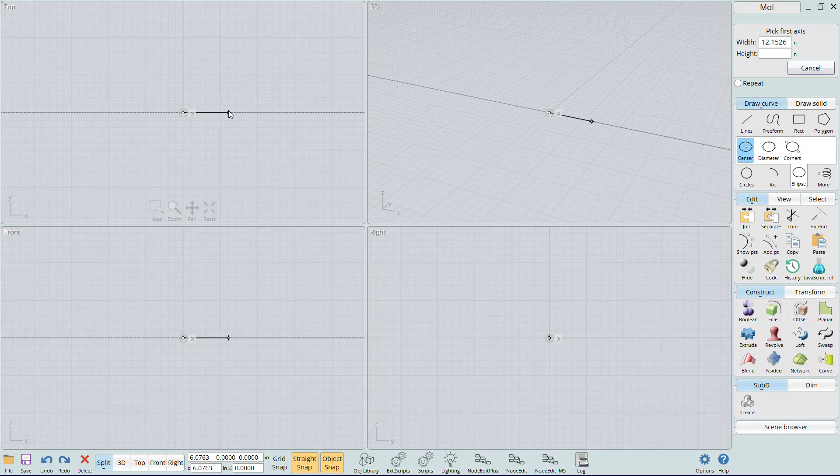Okay, checking out the Conic tool. Let's go with an actual size one.

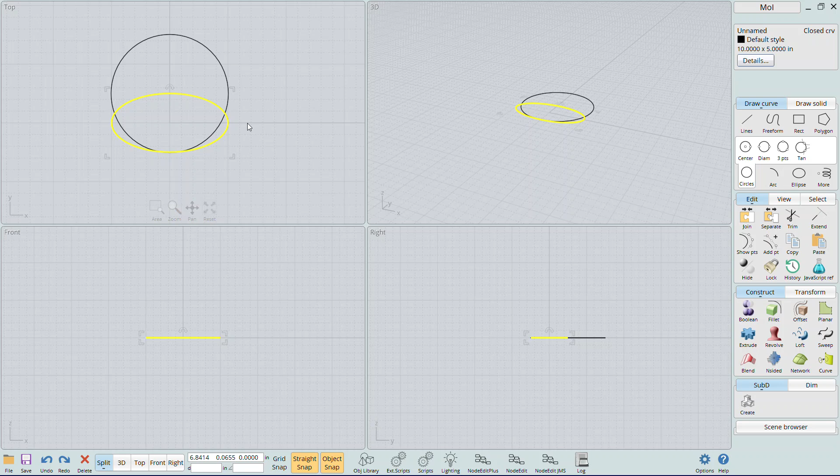And so there's an ellipse, a 5 by 10, 10 by 5. Okay, and then go ahead and put the foci on it, just for the sake of what we might want to look at after that. So that's a way to find the foci that I found. There's going to be one there, and there's going to be one there. So there's an ellipse with the foci for the conic on it.

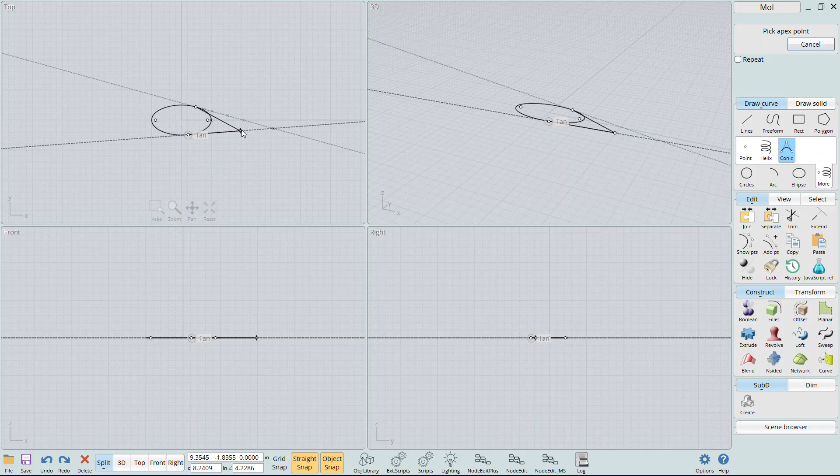So the conic tool, easy enough to figure out when you have the right side of the thing. Let's go ahead and start conic. And then if we can easily get the tangent points from wherever we're connecting to, right? We can easily generate that conic right there, right?

Did I miss one? I must have missed one of my pick points here. Let's just, I need to do this just to be sure I'm using, there's a bunch of snap points that I don't want to screw around with turning off right now. They're getting in my way. So let's use that one and this one. And now I can click there and there. And then it's a nice conic section.

And you can do that anywhere on any ellipse. So as long as you can get those tangent points, like say there and right here. Now I can get that one and then this, and I can match up that. You see? So that's basically using the tool.

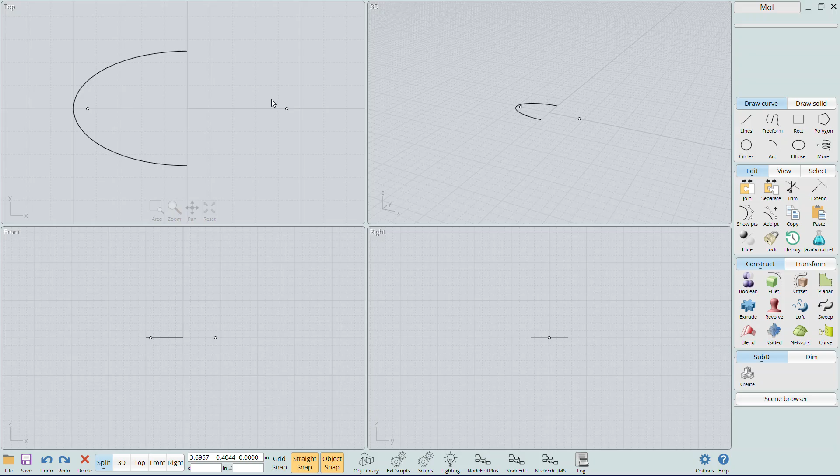And then I asked a question to Michael because I got stuck on what if I had this, right? And then I was basically like going, now how do I get the other half? How would I get the other half of that with that tool? Or that would lead into several different areas where if you just had part of a conic and you were trying to attach to it, but you didn't have the right thing to do it. So this isn't the answer to all those particular situations. In other words, there's the Arc Continue tool. It's basically almost the equivalent of doing blend, which gives you a nice smooth butt joint on that.

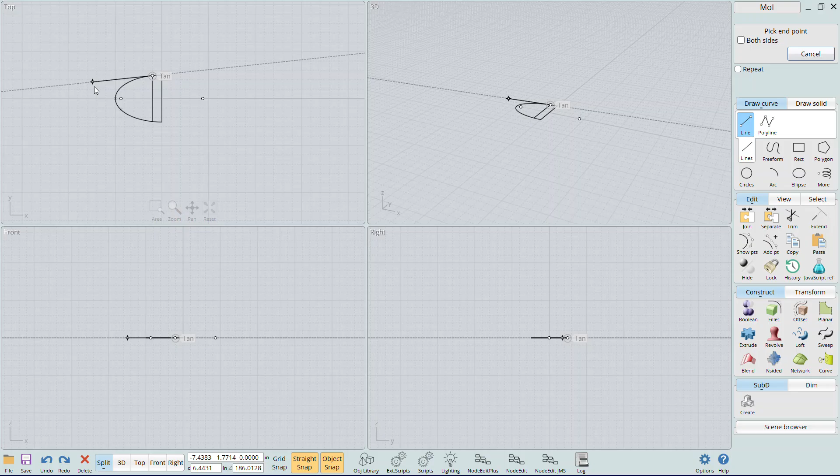But just something I found really quick I wanted to put in here was to use the other side snaps, right? And then I can just pick a random point there. And then now I can get that tan from that side, go all the way out to there, right? And now I can do this. Um, so let's see, let me think real quick. Mirror.

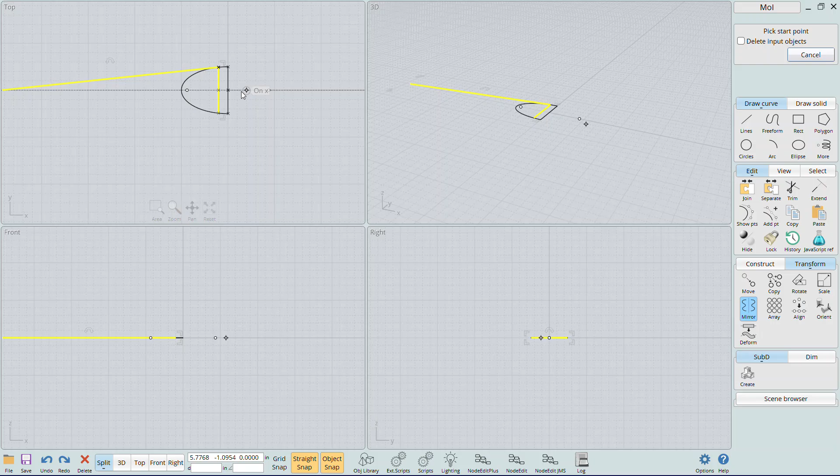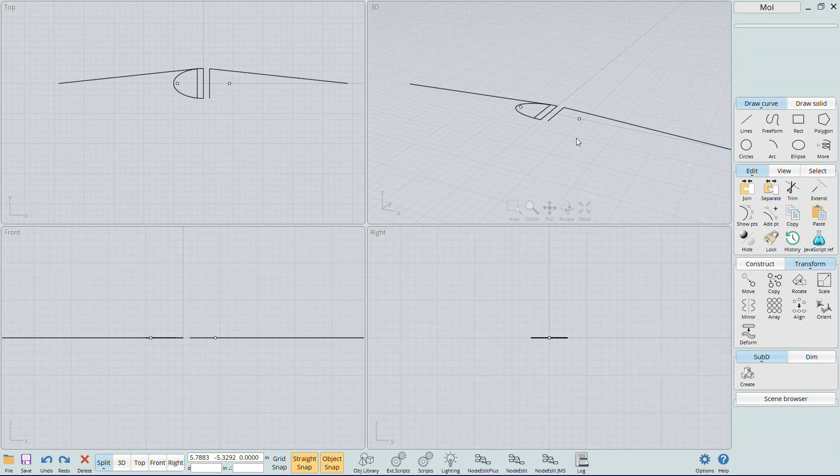Right? And now I can draw a conic that would match this side. So if I had to draw a conic, it would have to match from here, not from here though, right? So easy enough. Let me get my conic drawn here. So there's my two there. That would be my apex, right? And now I need to know where to go there to match. So what I can do is just go here and go all the way to there, which gives me my pick point on the other end, and go there. And now I have my ellipse back, right?

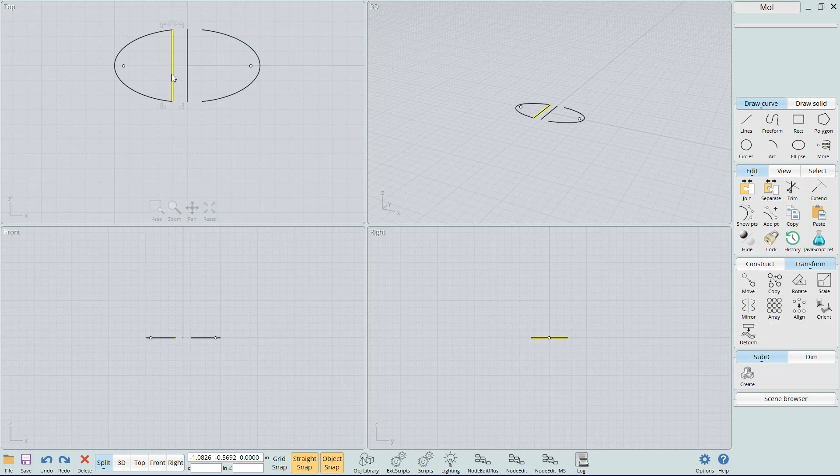Oh, that's the one I wanted actually, because I'm going to go like this. And then I'll just run a blend between those two. Actually gets me a pretty good representation of my ellipse back, right?

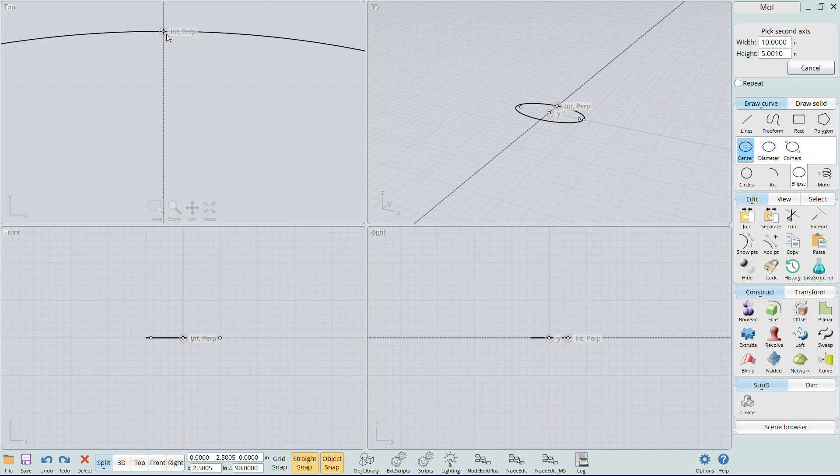And so if I actually go here and go like this, it's pretty much my ellipse. This is up here where the deviation would happen, if any of it was happening because of my stuff. And that's a pretty good zoom level. So that's a pretty accurate recreation of the other half of that ellipse.

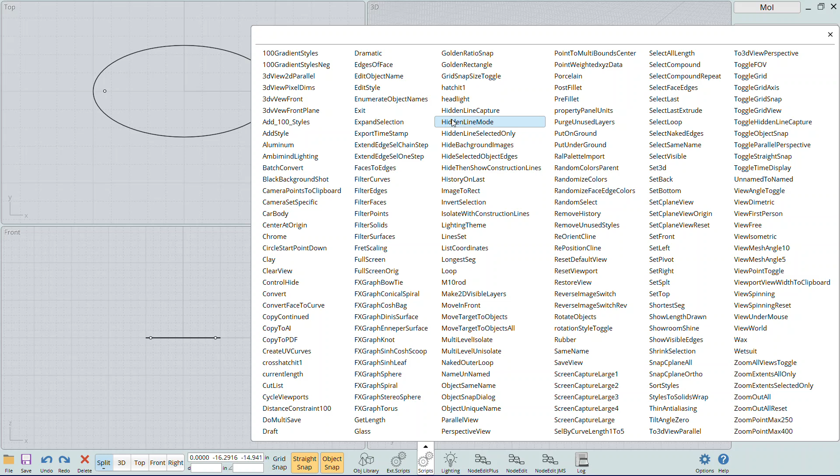And then because I was working with the ellipse, just to throw this out there, I was also confusing myself. These are the foci of the ellipse. And then Michael has a couple of tools that are hyperbola and parabola. And then I was confusing myself on using it. Where is it? Oh, I'm on scripts. There it is. Hyperbola. So I was going, oh, focus point. These are the focus points, but then on an ellipse.

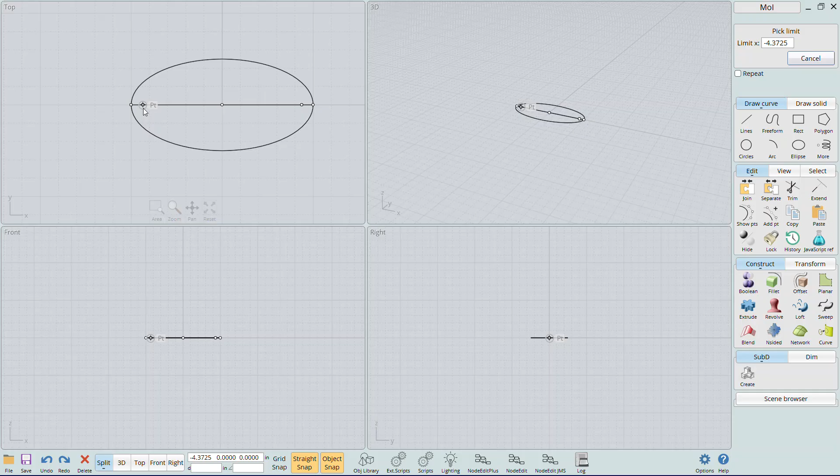But for the parabola, so I'm going to go there, and then that actually, I'm actually creating a focus point for the parabola. It doesn't have anything to do with the ellipse. So if I pick there, it actually makes the parabola off of the actual focus point that I picked. See that? And then the hyperbola, and same thing, the parabola is just the other way. But it's just not doing the same thing as what the ellipse, because those are defined different ways, you know what I mean?

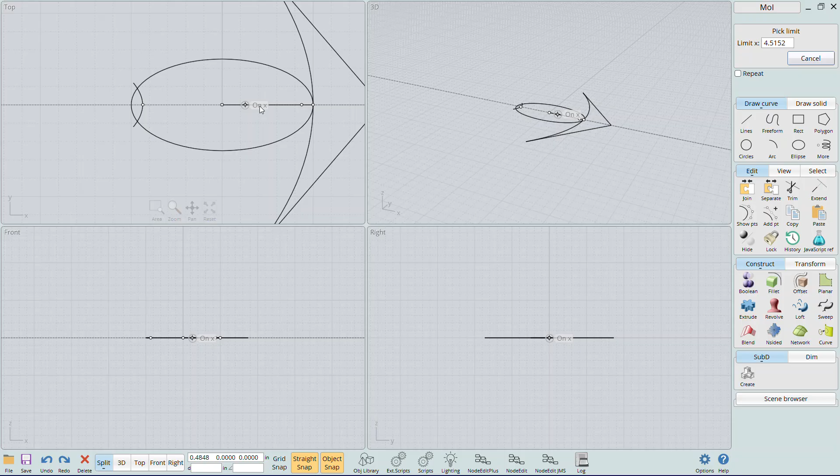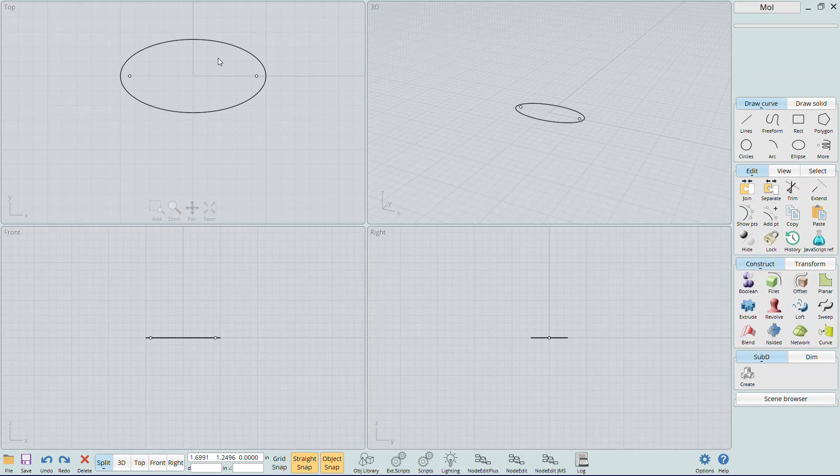So if you want the hyperbola and the parabola, it's going to be for a different situation. It didn't have to do with me wanting to use it to make conic sections on endpoints of things, like redesigning wing structure or something like that. Anyway, that's enough for now. It's just a quick overview of the Conic tool, and talk later.